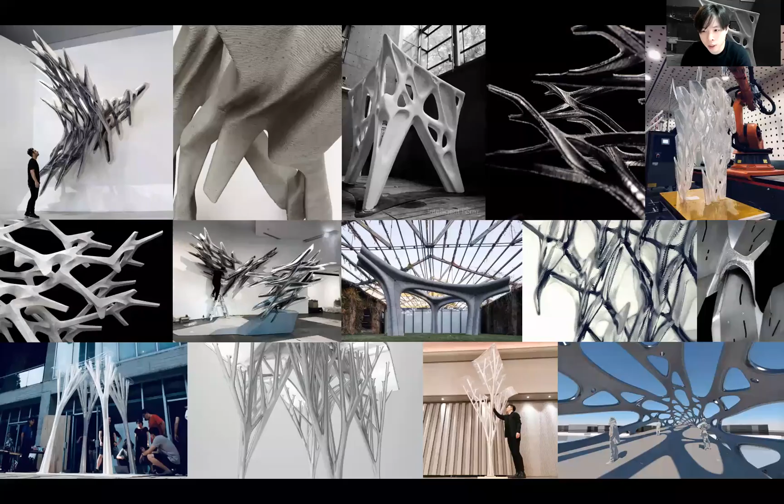Okay, this is a quick look at my projects in the past few years. So the topic I'm going to talk about is performance driven architecture design and structure optimization. The background, motivation and problem of my research come from three aspects: inspiration by nature, the collaboration between architects and engineers, and also the lost connection between complexity and efficiency simultaneously. Another one is the imbalance between architectural aesthetics and structural performance.

So my research is on algorithms for intricate forms and also mass customization manufacturing for the construction industry. To achieve this research aim, a few questions will be addressed. One is collaboration, one is aesthetics and performance, one is the advantages of topology optimization methods, and also robotic fabrication.

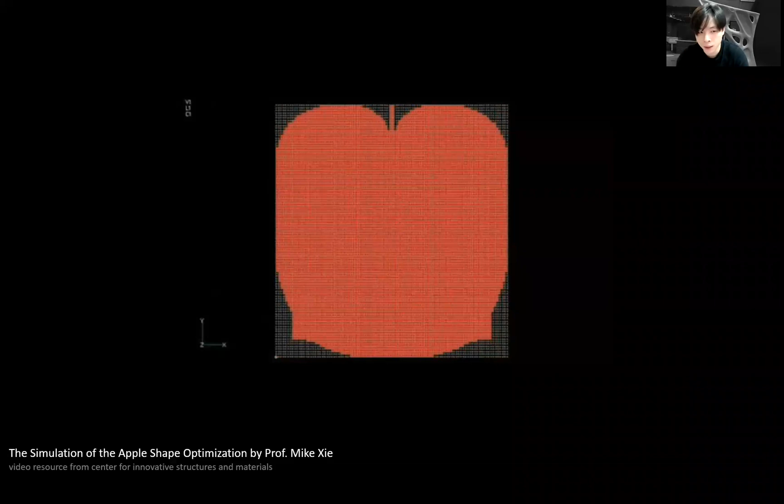So how can we balance aesthetics and performance, which is architecture versus structure? So form from nature, then how can we generate the natural form rationally? So start from this apple. It is the simulation of an apple shape optimization by Professor Mike Xie.

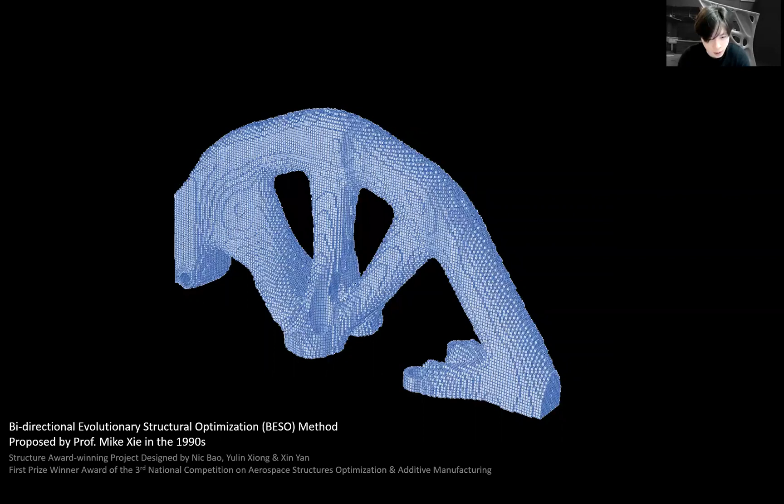Then later, Professor Mike Xie proposed the BESO algorithm, which is the bidirectional evolutionary structural optimization method. So we also improved this method, made some adjustments, and attended this national competition on aerospace structure optimization, and we got the first prize. So you can see the material is being removed step by step, while still keeping similar structural performance.

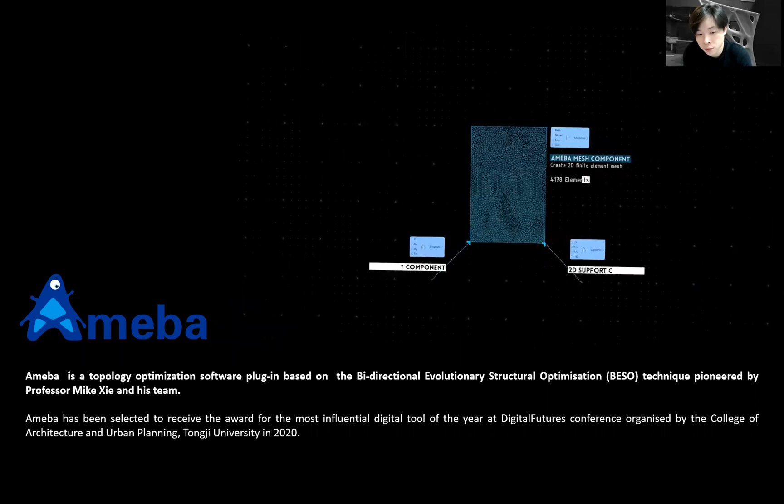So this method has been tested on several architecture projects, and more architects and designers started using similar methods to do architecture design. So this is Ameba software, a topology optimization software based on the BESO technique, developed by Professor Mike Xie and his team. And I'm also part of the team, so you can also try it if you are interested. So, back to topology optimization and generative design.

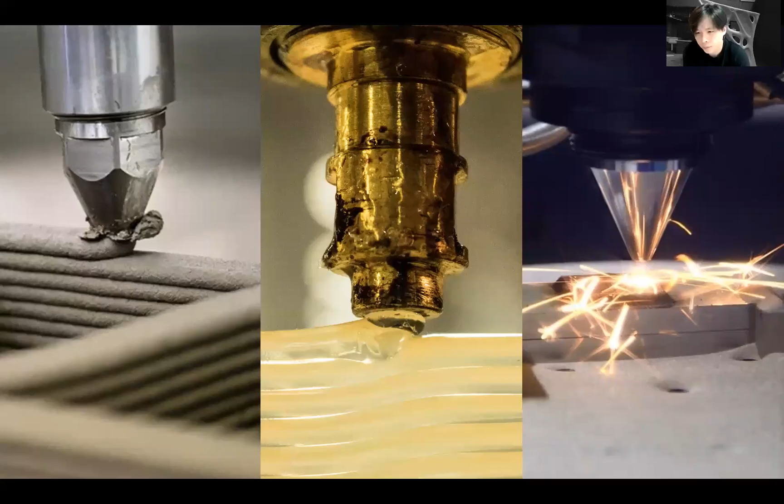Later, we also used robotic fabrication for architectural applications. Mainly, we use the RMIT Architecture Robotics Lab, which is directed by Roland Snooks, to realize our designs using large-scale 3D printing technology. The main materials we always use are clay, concrete, polymer, and metal print.

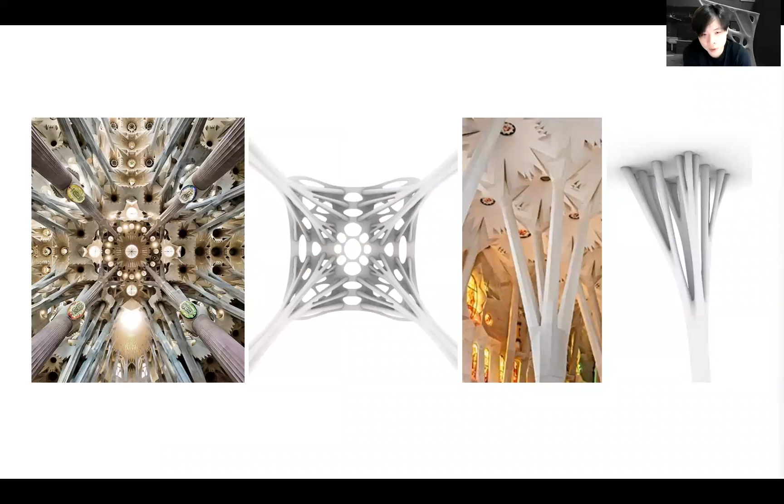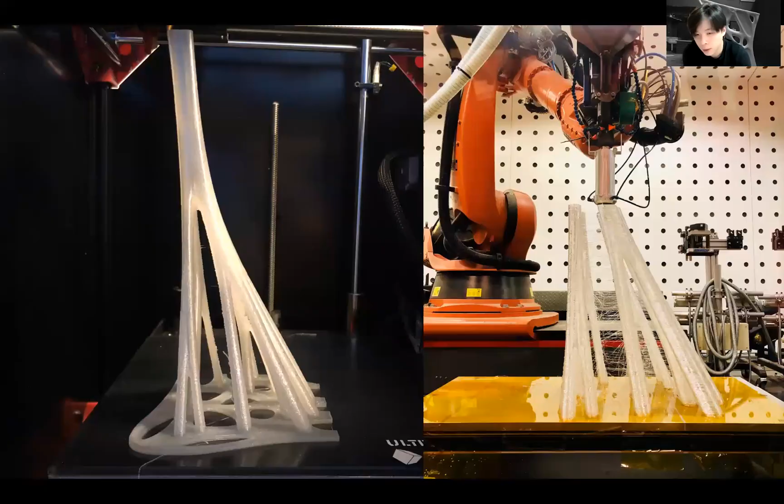The left side is a small 3D printer, which I believe most of you have already used before. And the right side is the large 3D printer we developed at RMIT University, which can print 2-meter high models, but because it is limited by the ceiling, the maximum print we can achieve is 1.7 meters.

So we brought these four big columns from Australia to China. We also designed the joints on the top and the joints underneath. The joints on the top can be used with plastic ties to hold the laser-cut top, and for the lower part we use a steel plate fixed on the timber ground.

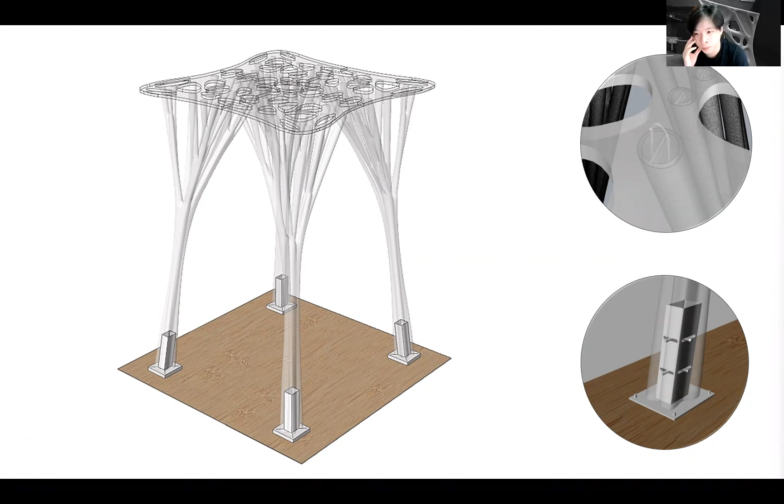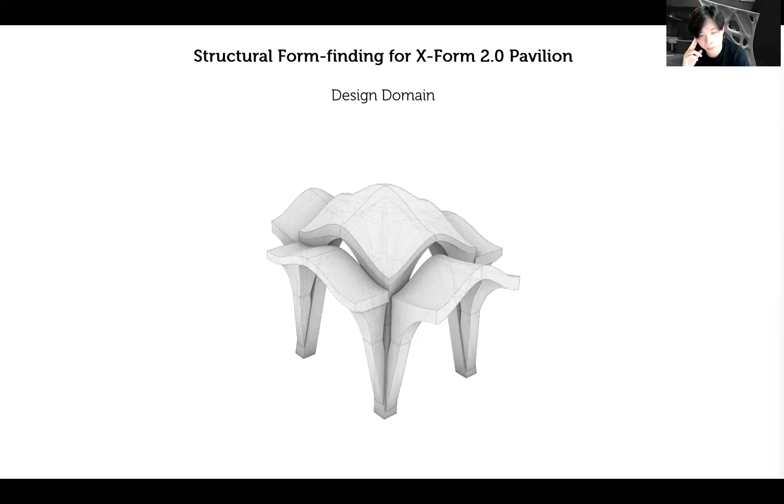So in the next project we improved the algorithm and made more branches. For the difference, you can see the original design domain. The previous one was a flat top with only one column. Now we're making three columns and three curvy tops. Then we divide it into four pieces because it is a symmetrical form, so we only optimize a quarter of the model.

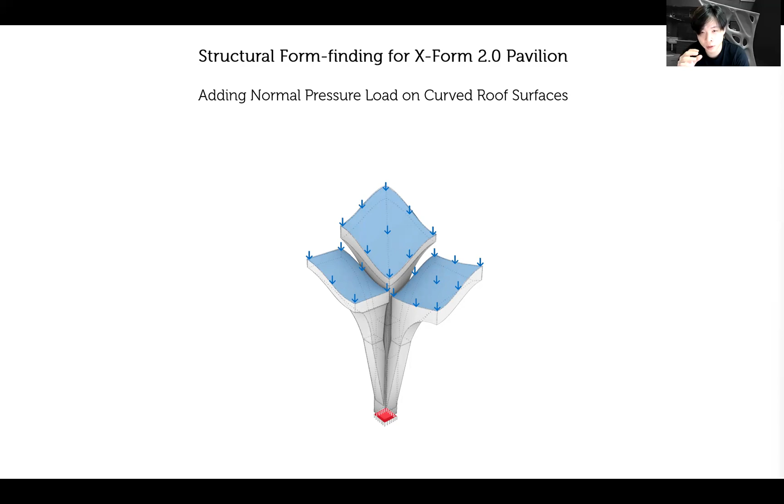Then we add the boundary conditions underneath, and also a normal pressure load on the curvy roof surface. Then we run the algorithm, and 52% of the material is slowly removed. Compared with naturally growing branches, you can see our optimized structure also achieves a tree-like branch. The right side is a quarter of the model of the overall simulated form.

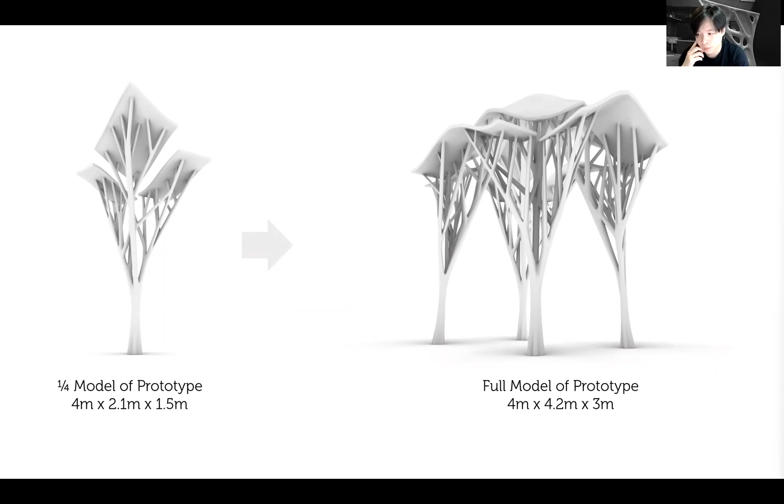So the quarter of the model is 4 meter by 2.1 by 1.5. So the full model is 4 meter by 4.2 by 3 meter. So after testing this new structure of the pavilion, it still meets the actual structural requirements and has very little displacement.

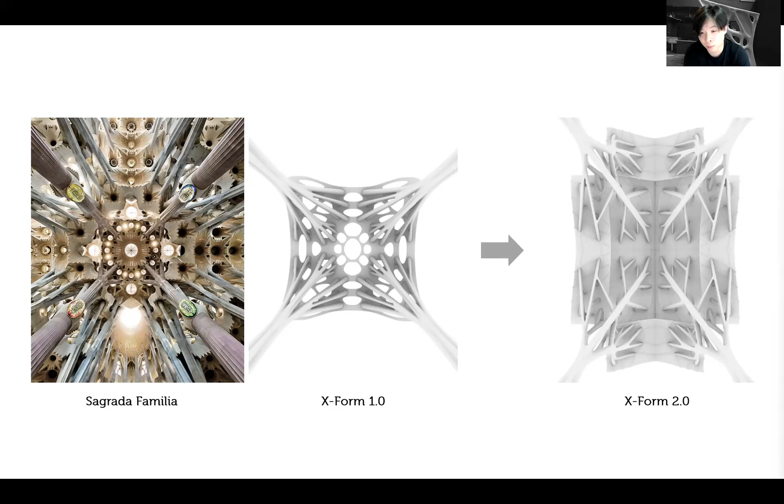Compare X-Form 1.0 and X-Form 2.0, you can find the big difference. So also compared with the full model, the 2.0 pavilion has more complex geometry inside and has more branches. This is the single column comparison. Same process, I used the small 3D printer to print a 1:10 scale model, which looks quite successful and can be printable. So the big challenge is to make a 1:1 model.

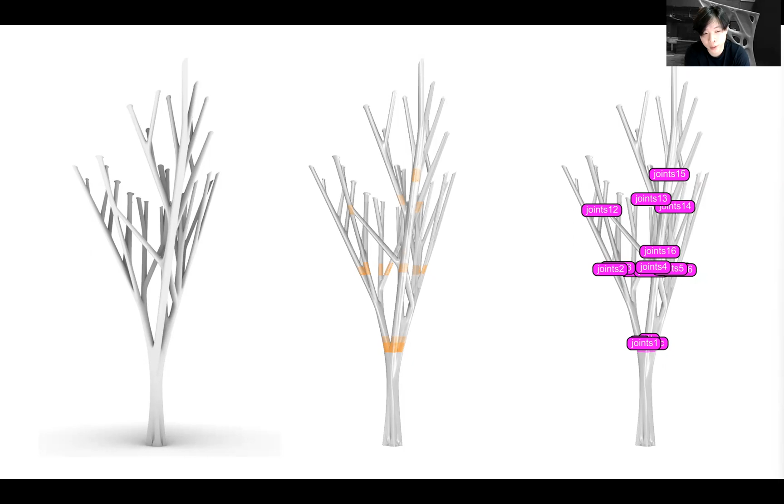So for the 1:1 model, we attended the IASS conference in Barcelona 3 years ago. So we had to carry it by ourselves. That's why we divided it into 25 pieces. So we used the robot to print 25 pieces and brought them to Barcelona to attend the conference. The overall assembly time is about 5 hours with only 2 people, but the overall printing took 200 hours in Melbourne.

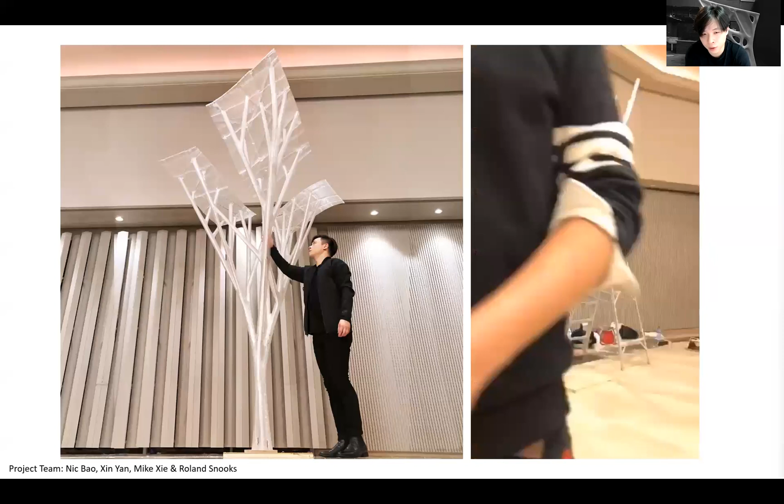So you can see this is the final 1:1, a quarter of the model, because we could not bring the full model, so it's a bit of a pity. So this is the assembly process. It's a very efficient structure. Also, this project won the International 3D Printing and Design Competition in 2020.

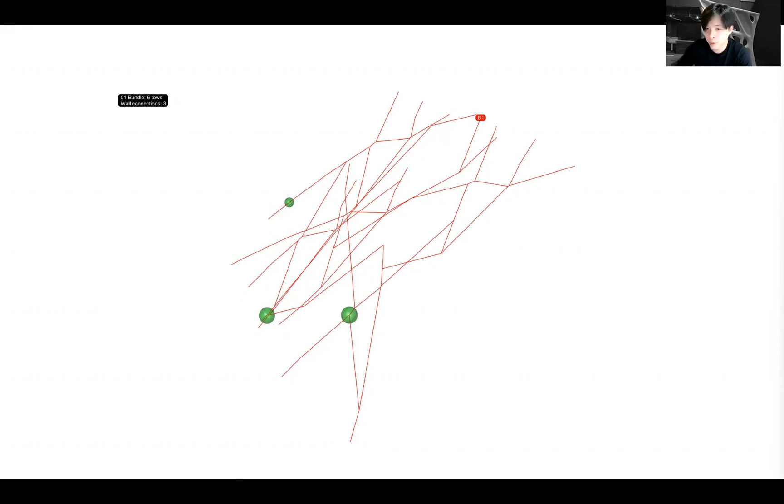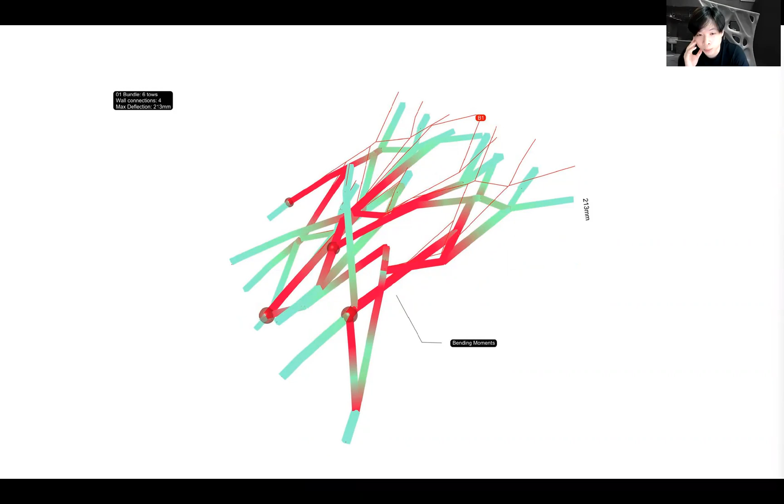So you can see this is the first edited version of the structure, where the red color means large deformation. So I'm helping to detect the weakest points, to improve them, then fix the deformation error in real time. So you can see adding the carbon fiber into the different branches, so it has less deformation.

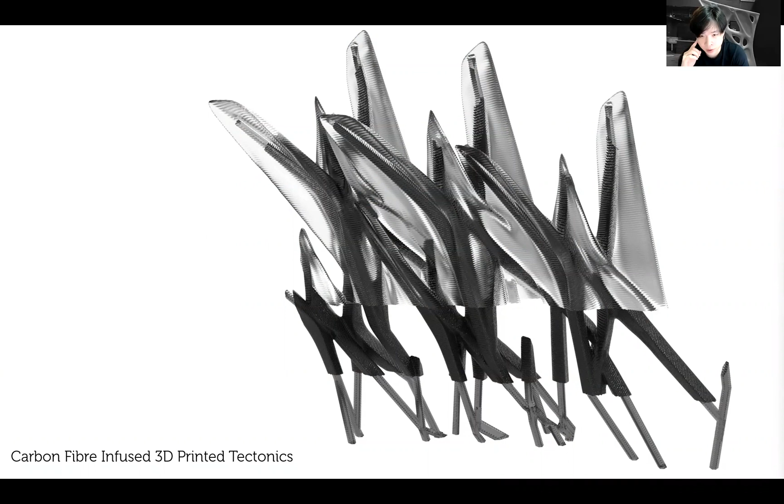So later we still used the 3D printer to print the form. So this can make carbon fiber infused 3D printed tectonics. So you can see there are 3 layers. Outside is the 3D printed PETG skin. The black one is the infused resin. And the gray one is the infused carbon fiber strands. So this is the final model.

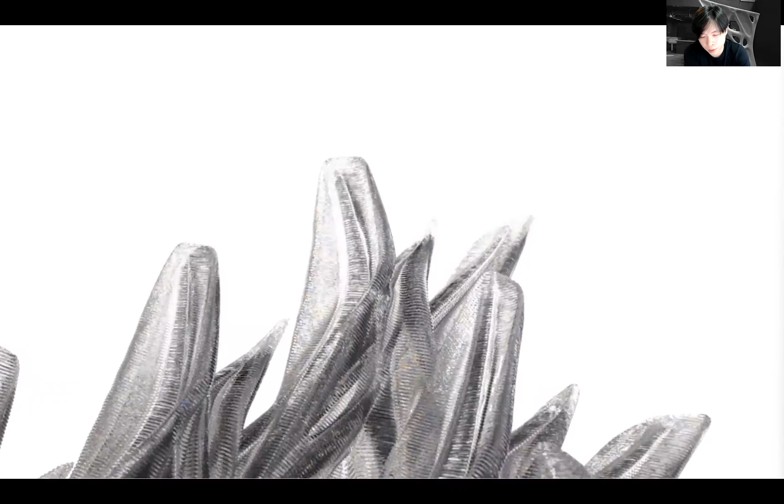Then we also wrote a paper called Super Composites. The co-authors are Hassan Mohammed, myself, and Roland. So this is the video showing how this project looks. This is a digital model. So you can see externally the plastic transparent skin, and internally the carbon fiber structure. Yeah, the render looks much better than the real project, because in real life the printing can be a little bit different with the real material. But it's not too bad.

So we built it, assembled it, and delivered it to China to exhibit in the Shenzhen Biennale. It's a large team project led by Roland, fabricated by us and structured by myself. This happened 3 years ago. And last year we improved another one, called Sample the Future, and we exhibited it in the National Gallery of Victoria in Australia.

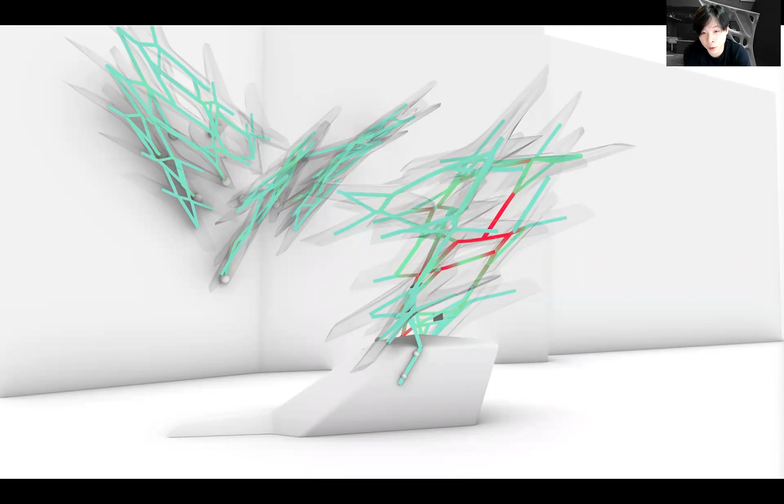So we made another version, which is improved a lot. And I'm going to show you. I'm also improving the code to make it more efficient and faster in the simulation. So this is the testing for the real-time structural feedback. And this is the final project.

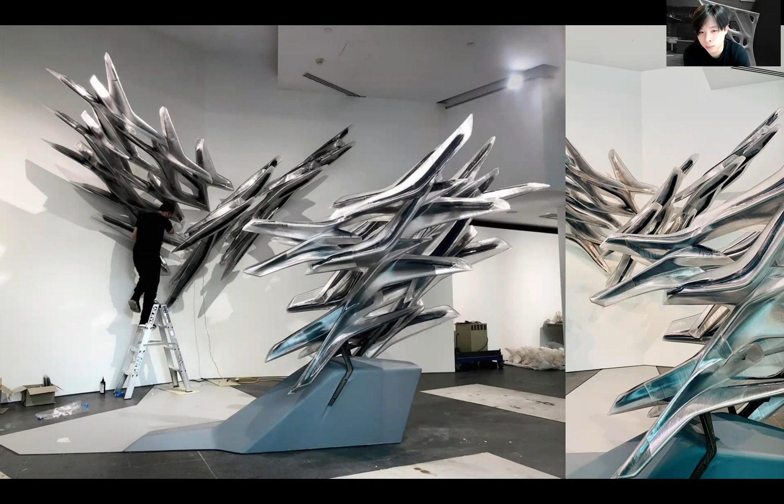This time we made it into 2 pieces. One is on the ground, like an island sculpture. Another one is the 2 wings hanging on the wall. So this is the final image of the exhibition in the gallery. One piece is on the ground, another piece is on the wall. My main contribution is still the structure, and also fabrication and robotic 3D printing. Yeah, so this is the final project exhibited in Australia.

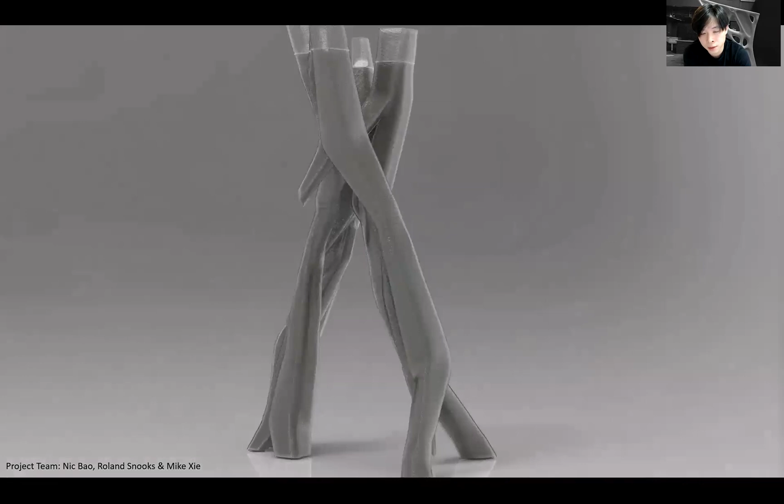Later, this project called Cast Bodies, which is part of my research, uses a similar algorithm and method to design the combination of the structures, and the model is a sacrificial concrete mold. Then we cast the concrete inside. The project was selected for the Venice Biennale. So this is a video where you can see the concrete casting into the model. So this shows the benefit of robotic fabrication: it can print intricate forms for complex architectural geometries.

And the sacrificial formwork also is like an ornament for the project, making the concrete much nicer. So this is a real project. The last one is only the digital video. And we're making two models; the other one is not sacrificial formwork. We can also remove the form, which only leaves the concrete. But this is only about 700 millimeters high. It's also only a test.

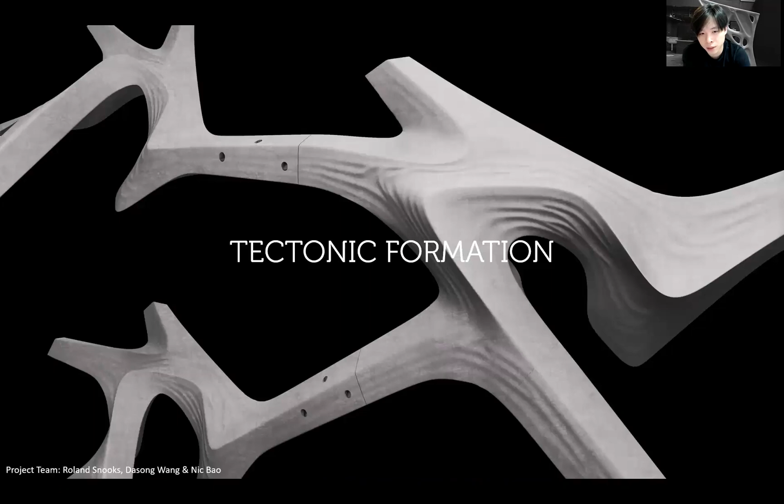But last year, Roland and myself also developed another project called Tectonic Formation. It uses a similar way to design, which is agent bodies. Then we 3D print the mold, then cast concrete. After that, we design all the joints, and after removing the mold, which is the demolding process, we have these cast agent bodies, which can easily be removed from the mold. So we plan to develop this kind of agent body using the algorithm to develop a wall like this.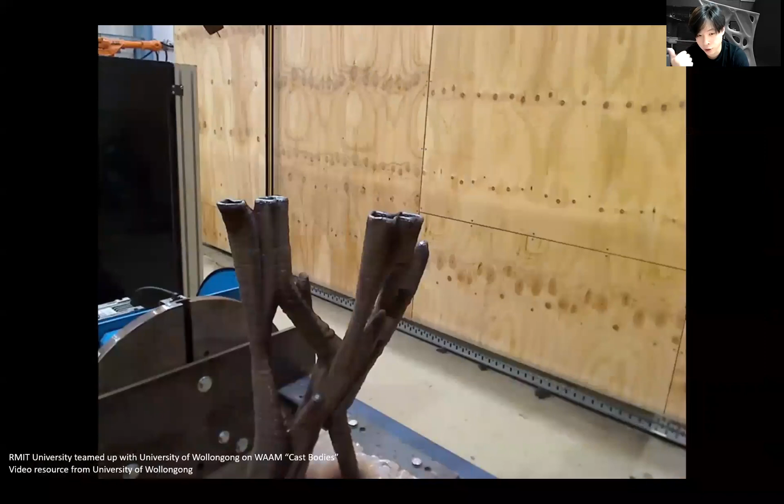This research started in 2020 because of the COVID lockdown. So we collaborated with the University of Wollongong to help me print this project, called Cast Bodies. You can see the quality is not quite good because it's only early testing. It's the same project, same geometry, but testing different materials and 3D printing technology. This is the final geometry. It's pretty good, but it's not perfect.

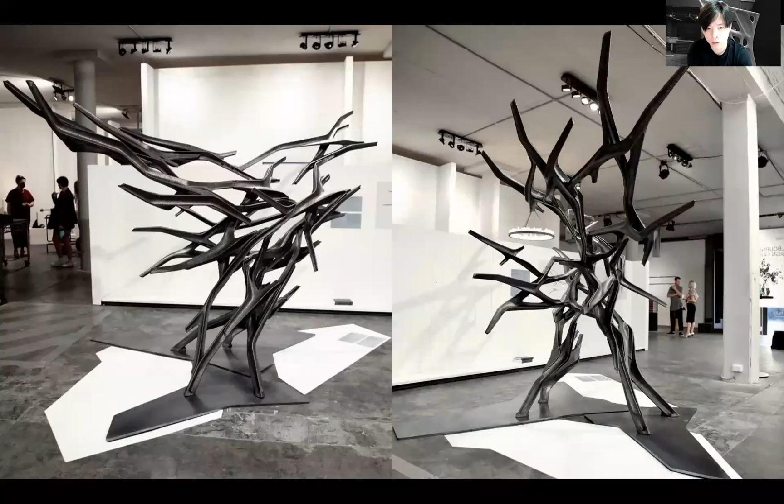So this year, I'm also developing with Roland, using the RMIT facility, a new technology, which was shown at Melbourne Design Week this year. If some of you follow our Instagram or Facebook, you will see this project. This project was designed by Roland Snooks in collaboration with my company, FormX. We printed and fabricated it as a sculpture. This is the final printed project we exhibited at Melbourne Design Week and the Melbourne Design Fair.

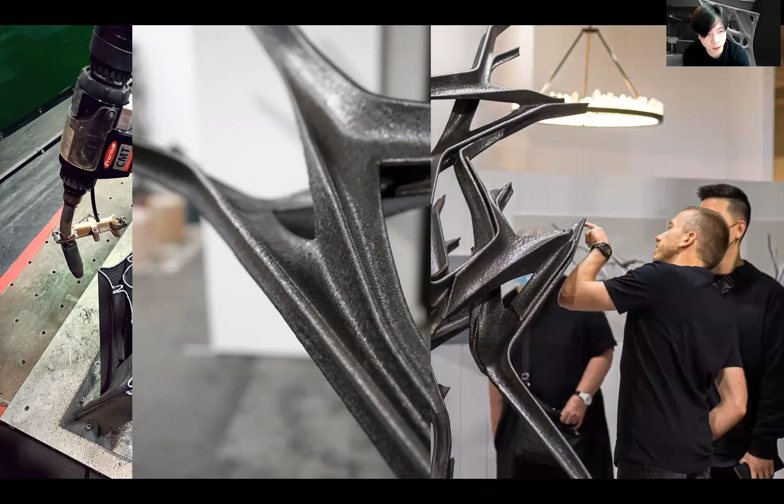Later, I'm going to move this project to my friend's winery as a permanent installation. We used it to print the geometries, using the algorithm we developed. You can see the quality is much better than before, with very high resolution. And this is the photo from the exhibition.

I also want to introduce the next project, called Intelligent Form. Intelligent Form is supported by Digital Future and also China Construction. It uses topology optimization. We set up two walls, then used topology optimization to generate the patterns. We fixed the three bottom parts and applied the loading and wind loads to get the material removed. So this is the topology optimization method. Later on, based on the geometry, I refined the model to make it nicer and smoother.

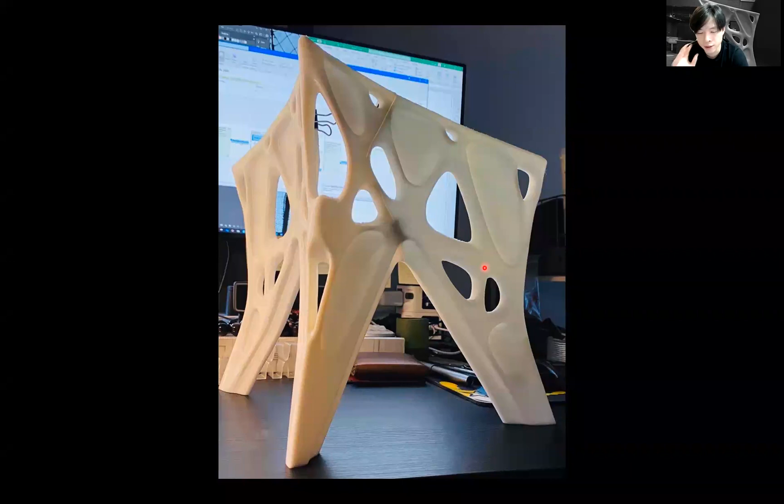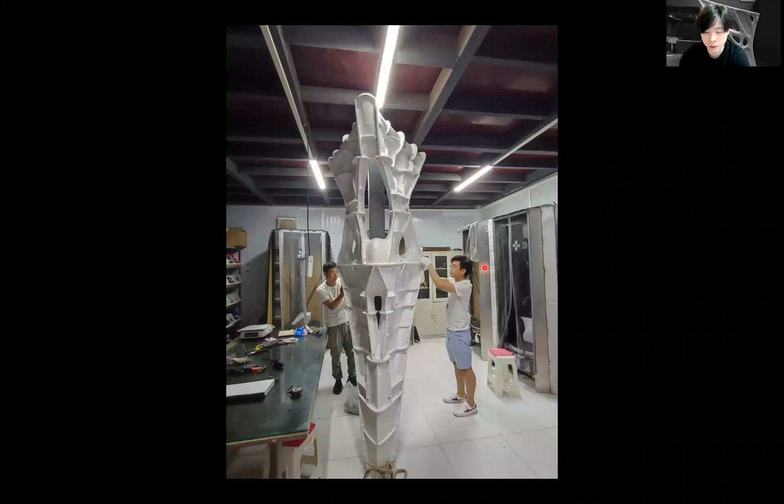This is the same method, a 1:10 printed small model. Testing the performance, very similar, less deformation, looking quite good. Later we had to make a 1:1 model, and we used 3D printing. So we needed to design the mold. You can see we designed the mold, the joints, and the flanges, which connect with each other. This is the side part, this is the middle part. Then we sent the mold to the factory in China and fabricated it piece by piece. This is the large piece on the side, and this is the middle piece.

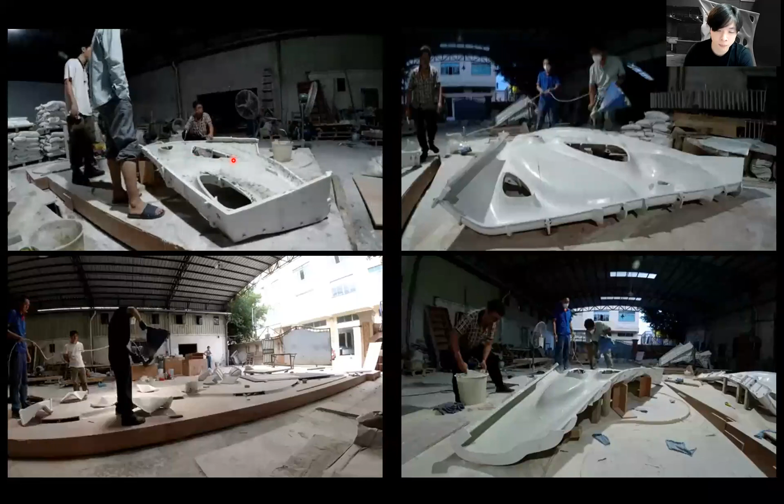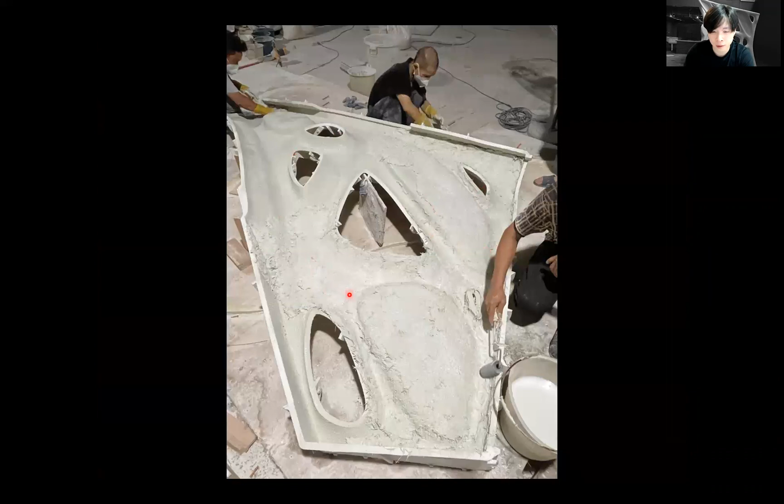Then we used a new technique, spraying UHPC concrete. You can see the workers spraying the concrete on the mold. This is the first layer of concrete, making sure it doesn't leak in each gap. This is the final layer. Overall it's very thin concrete. Then after demolding, we also polished the concrete surface. And this is the middle part.

So you can see the middle part, we are demolding this piece of the mold. And this last piece is to protect the edge of the concrete. It's very heavy. Then we delivered it to Tongji University in Shanghai, and we're making some holes on site.

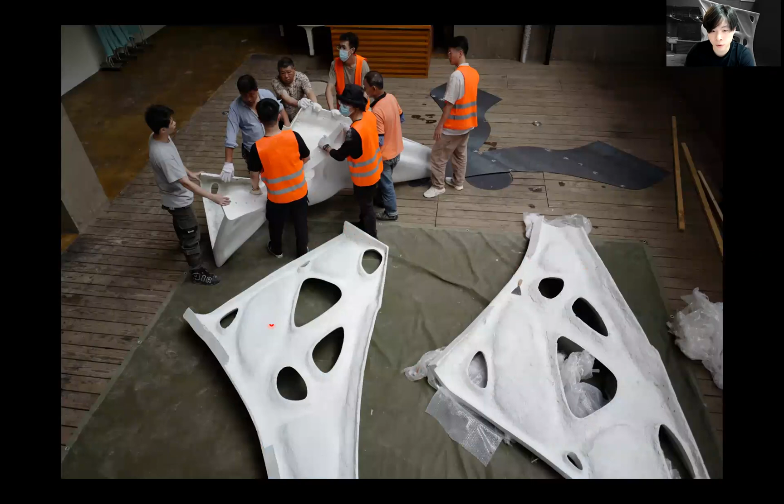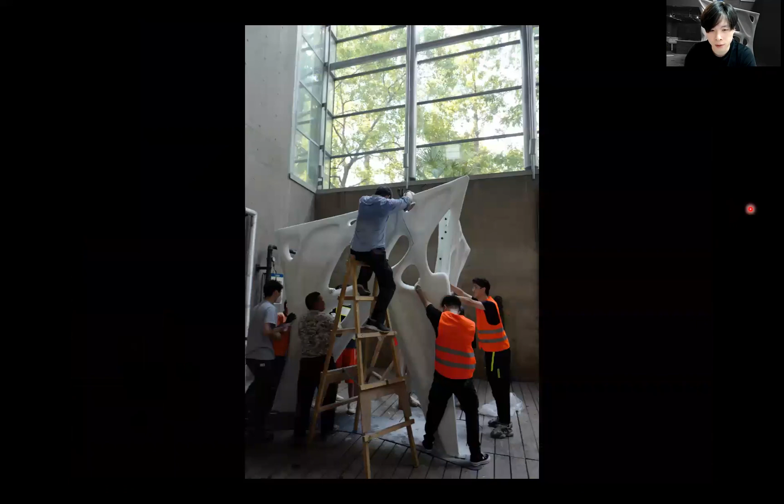There are three major big parts, 1, 2, and 3. Each piece is about 150 kilograms, so we need a lot of people on site to help us. Some of them are students, some of them are workers. It's very large pieces, and we assemble it on site. So this is the final piece.

So this is the video from site. You can see we still have the steel one to hold it because we finished the project very late. The best performance of the concrete is after 28 days. So after 28 days, we remove this one.

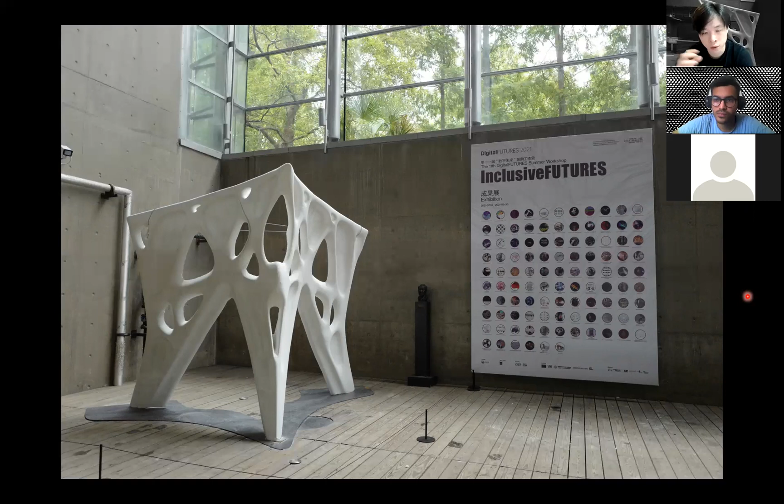So it's Digital Futures. A lot of Indian students also attend Digital Futures. Hopefully this year it will also happen. Some photos on site.

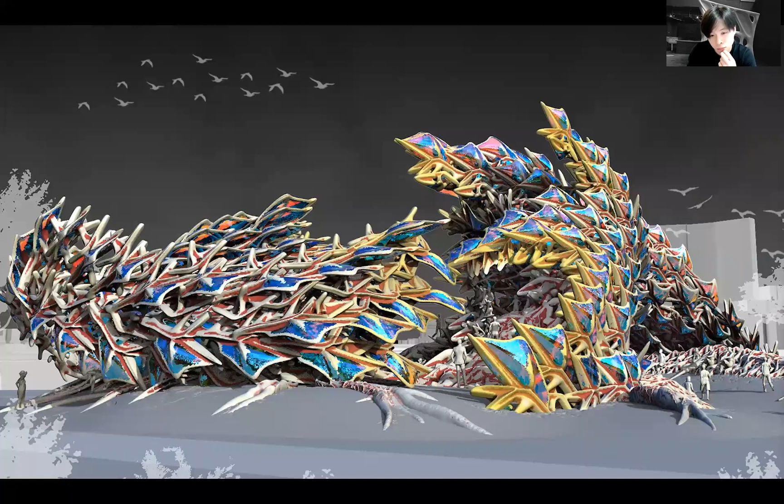Forming Complexity is a design studio in the territory among digital fabrication, algorithm design, materiality, additive manufacturing, and the structural optimization of complex forms. This studio aims to explore advanced architectural design and tectonic implications of carbon high-tech composite systems, accompanied by new fabrication techniques such as 3D printing and robotic fabrication in the architectural context. Now, robotic fabrication and 3D printing are rapidly changing the feasibility of constructing geometric structures with a high degree of intricacy.

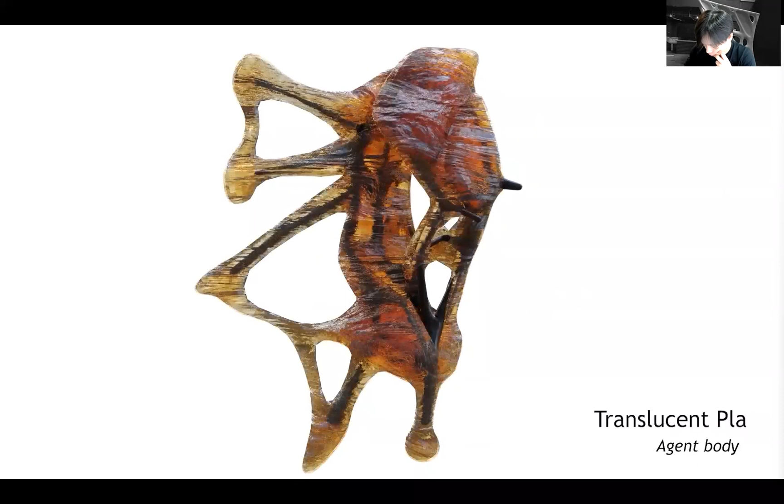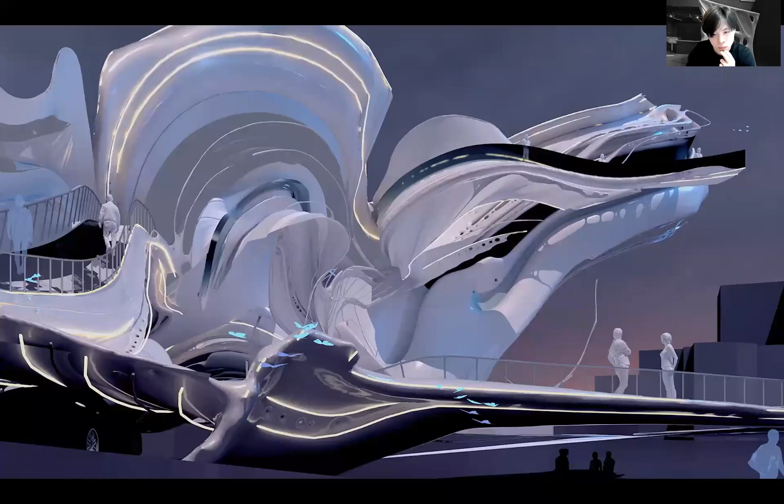Therefore, emerging architectural design approaches that leverage the capacity of algorithmic design and digital fabrication methods, such as robotic fabrication and 3D printing, are able to create highly intricate built architecture in the near future, especially in the cities of China. Through a series of generative design form finding, a number of designs will be proposed to achieve exceptional architectural qualities such as complex formal expressions, interesting spatial qualities, and innovative digital fabrication methods.

The studio will explore a series of architectural components and building systems to reimagine architectural style influenced by the implication of robotic fabrication and high-tech composite materials in other industries such as aerospace and automotive, which have transformed the culture and approach towards design and fabrication in these industries for many years. Students will design a series of architectural components and building systems to reimagine architectural style.

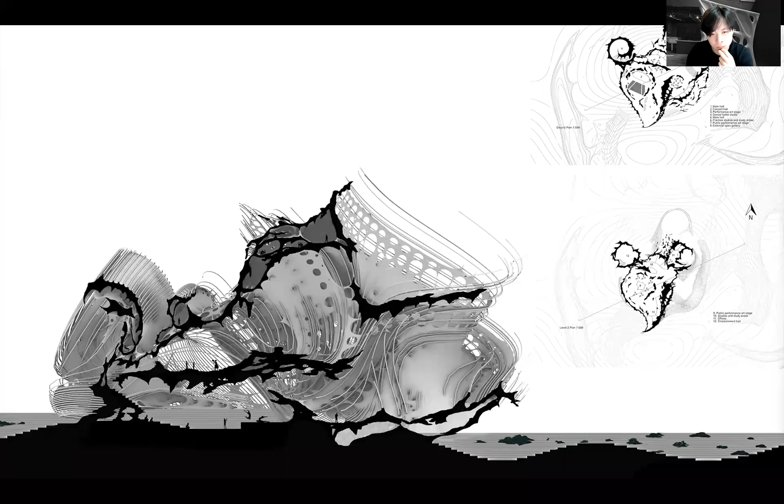The new design proposals for the future city will accommodate fabrication constraints as well as aesthetic qualities and planning considerations through developing and testing new intelligent design methods and new construction techniques.

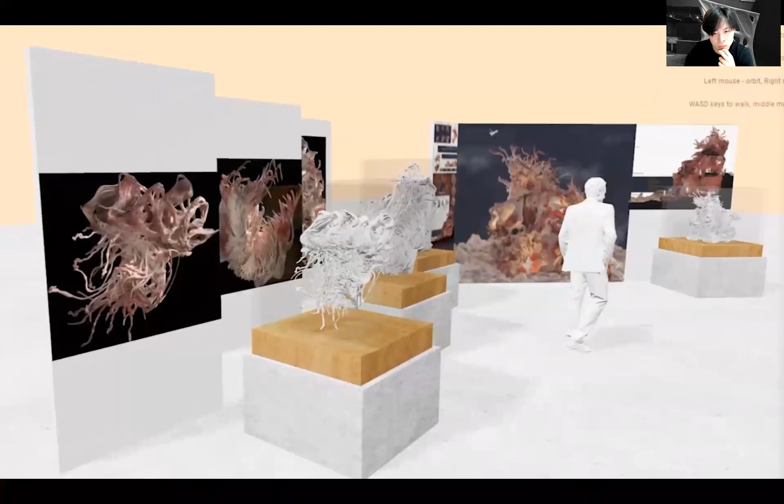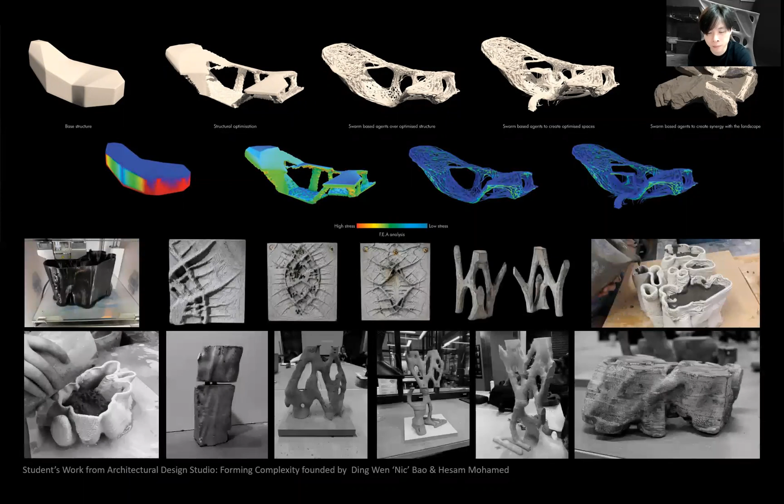So in my design studio, students use similar methods, combining swarm and topology optimization, then later testing the fabrication. These are images from my design studio work, students testing different geometry and also fabricating to make the intricate form have structural performance.

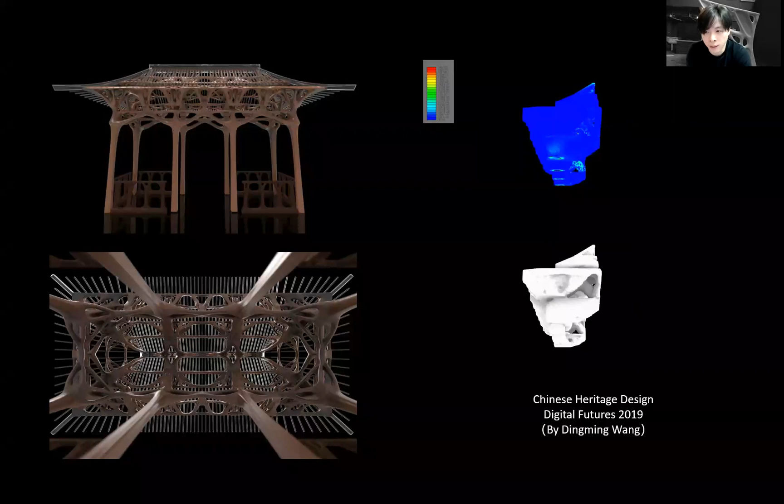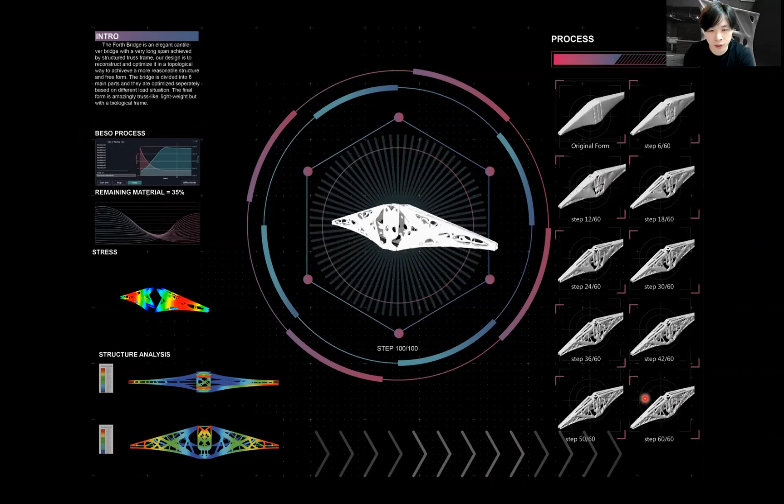Then last year, we were working with the China construction team; one is doing the big fabrication, and another one is designing the projects. I think there's one student in the audience who also attended the project. The student used a similar method to design a bridge. The student designed a sand gallery.

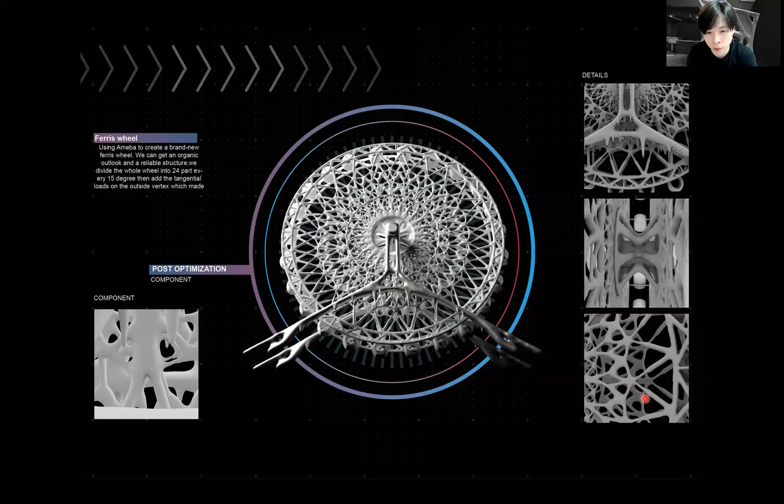The student designed the wheel, which is large, which you can find in some theme parks. It's a very nice render. So we helped them with the 3D printer, using 3D printing to print the geometry.

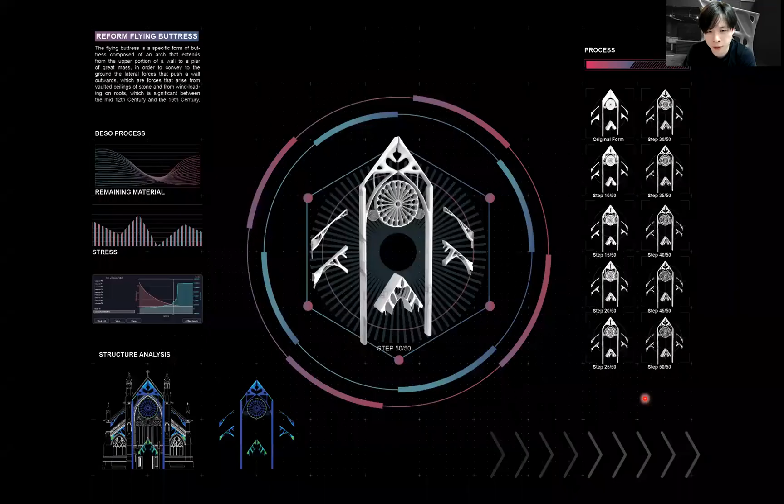And this student designed another Chinese heritage, but in architectural components assembled on site. They assemble into a large architecture, helping to rebuild the Chinese heritage. And this group of students designed the facade of the building, also another European heritage. So this is the final render.

So from the theory to the method to the application in my PhD study, you can see the new algorithm I developed. The result is quite interesting, using different data to control the final results.

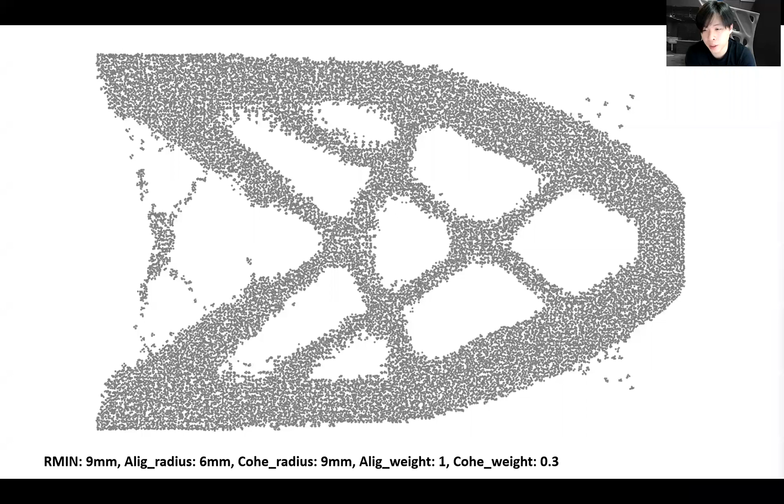This is the best final testing using the swarm and multi-agent system to run the best structural performance of the cantilever, this is 2D. Then later on, we test on 3D, and also test on the short 3D cantilever, but with a tracing load,

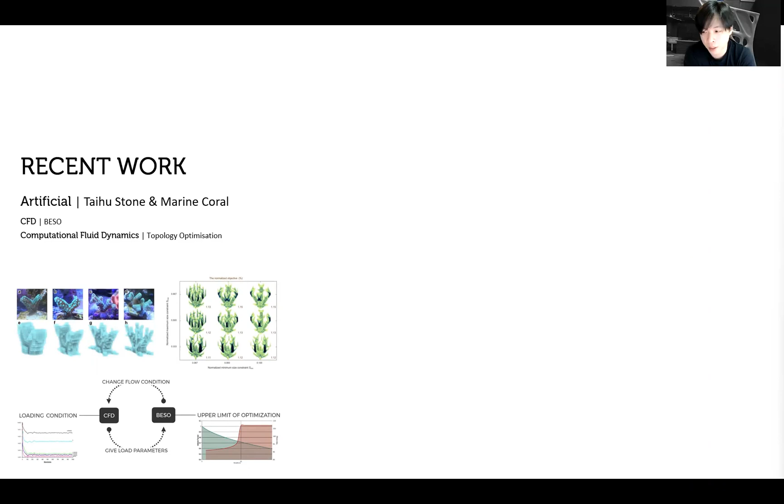The recent work I'm working on is integrating CFD and topology optimization. CFD is a computational fluid dynamic tool, plus with topology optimization method, working on the Taihu stone and the Marine coral, which is artificial, and working with students to test and analyze the CFD results and apply the BESO algorithm on it.

And this can create a porous space. We are still working on this and want to develop this algorithm into the Grasshopper plugin.

Also last year we invited Professor Philip Yuan as a visiting professor for the design studio at RMIT called Intelligent Force Printing. So this is the final video of the results.

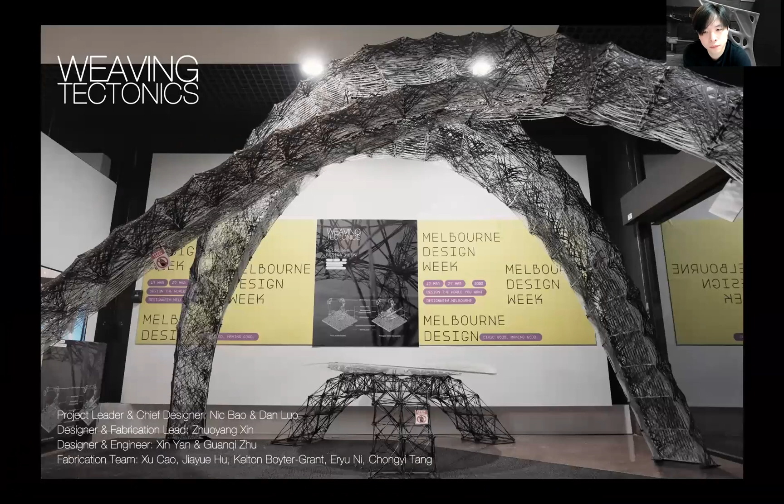That one just finished last month. I think this is the last project I want to introduce in this presentation, and we are also going to publish a paper to introduce more detail of the project.

All the projects were collaborations with different people, which I want to appreciate. If you have any questions, you can email my RMIT email, also check my website.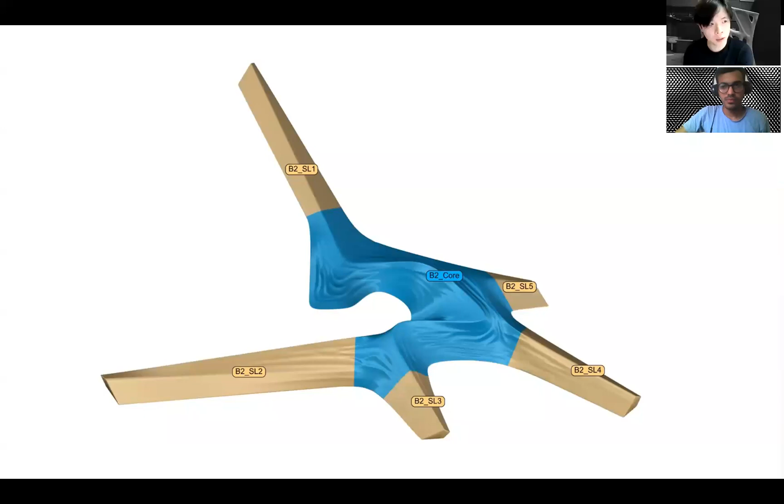Yeah, that's a good question. Maybe I can go back to one slide to give you a very clear answer. So you can see this image, right?

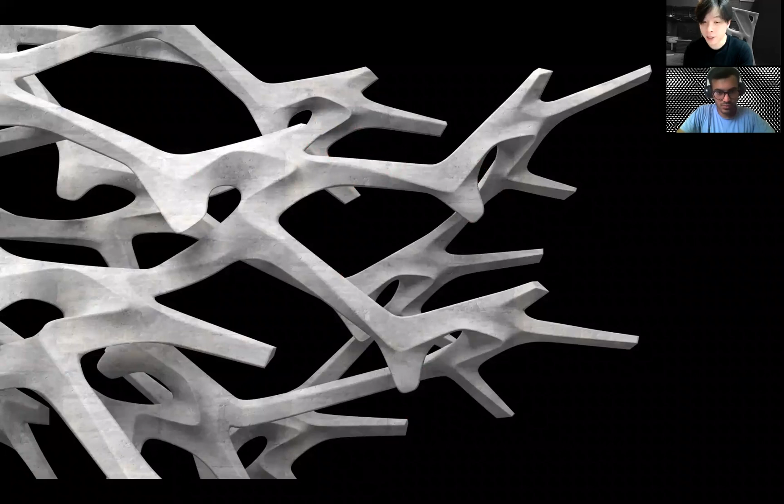So for example, this project, you can see it has four similar agent bodies, which are similar modules. When we want to do this project, it looks quite different in each module, but actually they have very similar parts. So back to this, the blue one is always the same. The only difference is the leg size. So it gives you a sense they all look different, but the modular part is in the middle. The leg can be longer, can twist this way, can twist that way, but we always keep the main part as the main module. So it can help with mass customization fabrication.

Okay, following up on that, another question that comes to mind is, yeah sorry, can you hear me clearly? Okay, so following up on that, the tool paths that you consider for the machine. Because in most of the projects where you're doing 3D printed parts, we saw a process of FDM deposition following a contour. So how do you take into consideration, sorry, yeah, you can't hear me, Aditya? Am I audible? Okay, so yeah, you're audible. I think Nick has a problem with his audio. Nick, let me know when you're ready and I could ask the question.